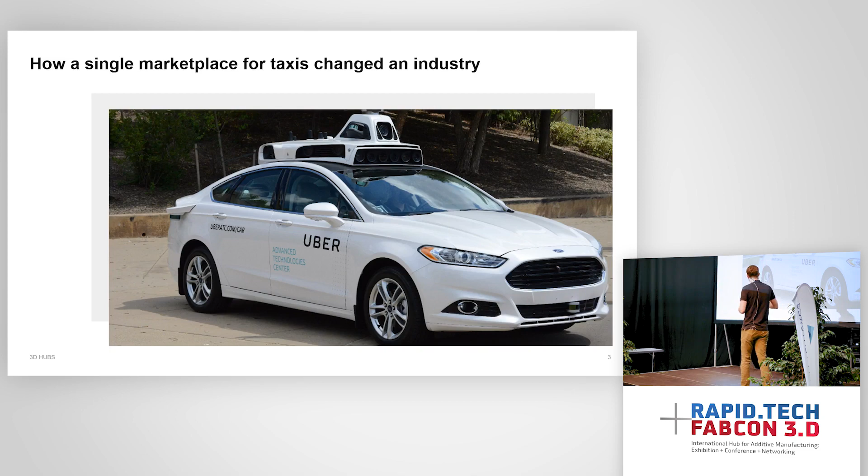And all of this has opened this little black box that used to be the taxi industry, where you never knew if you were getting a fair price, or if they were taking you on a crazy ride around someplace strange. Now it's all transparent so that we can make smart decisions.

Another good example I like to look at for a marketplace is Booking.com. If you go back to pre-internet days and wanted to book a hotel, you'd have to ring them all up and shop around to see where you could find the best price. Maybe the hotel had a deal, maybe the local tourism agency had a deal, but you had to contact all these places to find the best price. Booking.com, a Dutch company, came along and consolidated this all into one place. Now when you log on, you're shown all the options of all the hotels, and within each hotel, all the different agencies you can book through, so you can make a smart decision on cost and timing. Again, this puts the power in the consumer's hands. This is what marketplaces are good at.

Finally, and my favorite example, is the stock market. If I wanted to buy Apple shares back in the day, I'd have to go find a trader, go into his shop, and talk to him. I'd say, I'd like to buy shares, and he'd say, well right now this is the price they're trading for. I wouldn't have many options for research, and I couldn't really see what was available in the market. The person who walked in right after me had no idea what price I'd just paid, and no idea what price they'd end up paying or what the person after them would pay. As a result, stocks could be traded at completely different prices depending on what day of the week it was.

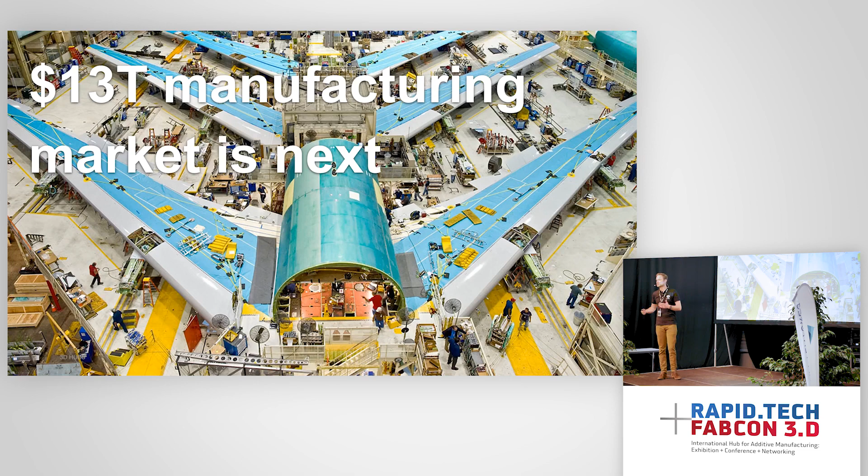Why is this the case? Well, some suppliers might need to order this material in, some might not have any capacity right now, and some might offer a short lead time at a very high price, but I don't know if that's fair or what's going on there. Within the manufacturing industry, 3D Hubs believes there are two things we need to figure out to really be disruptive, and the first is price and price transparency. This is really important, because going to three suppliers and looking up different prices every time, getting this kind of range, is a lot of work.

It takes a lot of time for an engineer or a designer to do, and they never really know what's fair. They don't know if they're paying a good price. They don't know how metal 3D printing is priced, or what the suppliers are doing.

The other area we think is ready for disruption in manufacturing is manufacturability. This is more complicated than pricing because there's a large range of variables to factor in when designing something to be manufactured. If you're talking about multiple technologies like 3D Hubs does - CNC machining, 3D printing, and injection molding - there's a huge range of design variables that determine whether a part can be manufactured or not. This is the next thing we want to solve.

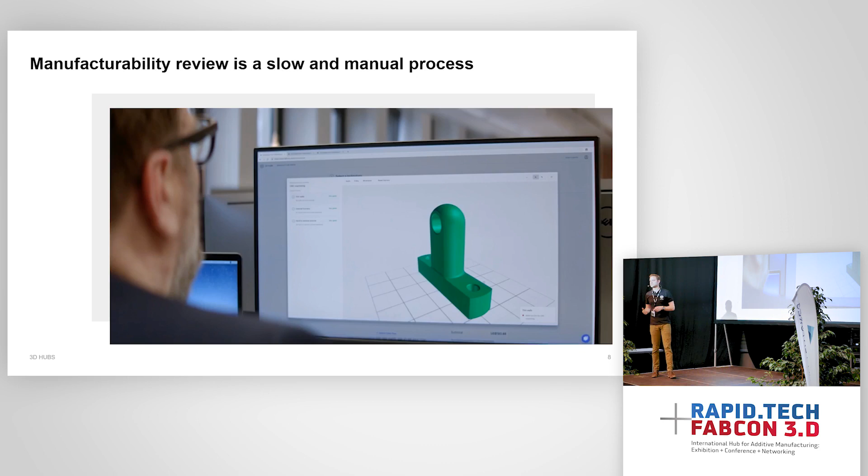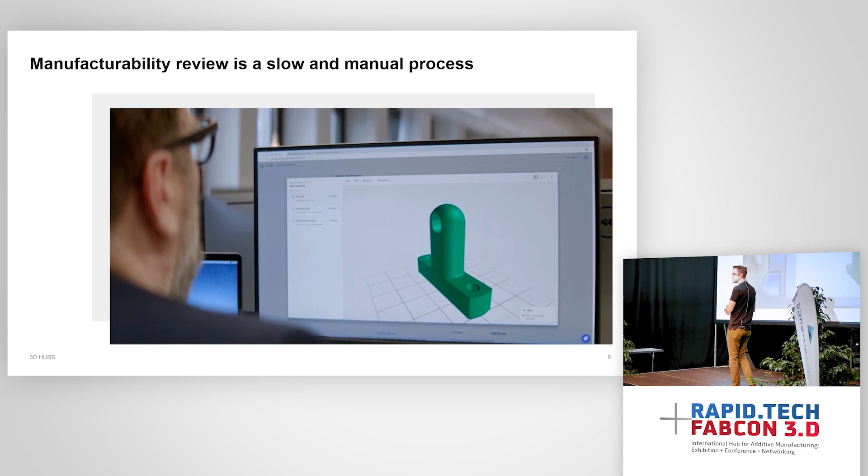So how do we do this with pricing? First, 3D Hubs is about 6 years old. We're based in Amsterdam, with a team of around 80 people, and we also have a small Chicago office. We've been doing this for a while, which means we've had around 3 million parts uploaded to our website over the 6 years we've been active. That's a lot of data points.

Data is one of the hottest commodities in 2019. You can make a lot of cool decisions and do agile things if you've got good data sets, and we do. So when we price a part on 3D Hubs, we look at parts we've sold previously that have been accepted by our suppliers, that have similar geometries, similar materials, are in a similar location, and are ordered at the same time of year. We take all this into account and use an algorithm to average this pricing and instantly price the part the customer has uploaded.

So we don't have a group of 100 engineers sitting in a dark room furiously working on Excel spreadsheets trying to write out quotes. This is all done instantly within 5 seconds by a smart algorithm. Going back to my stock market example, the result is that we become the stock market for manufacturing. We don't influence this price - it's what we're selling things to a customer for and what our suppliers are picking them up for that represents the price you see here.

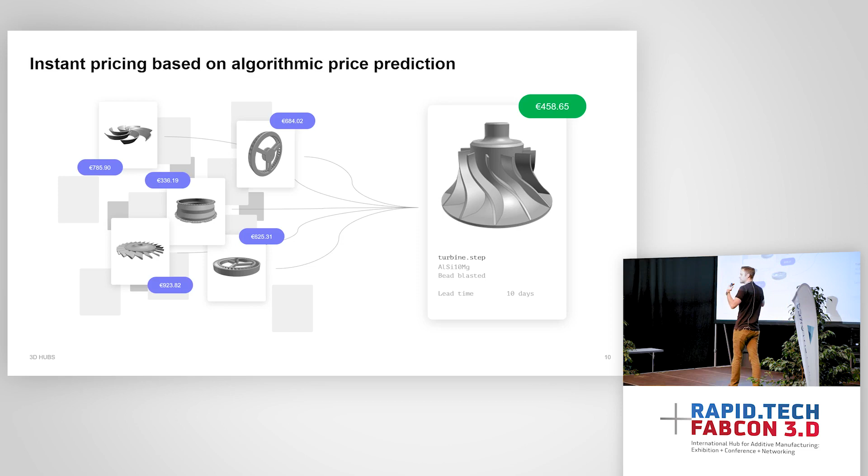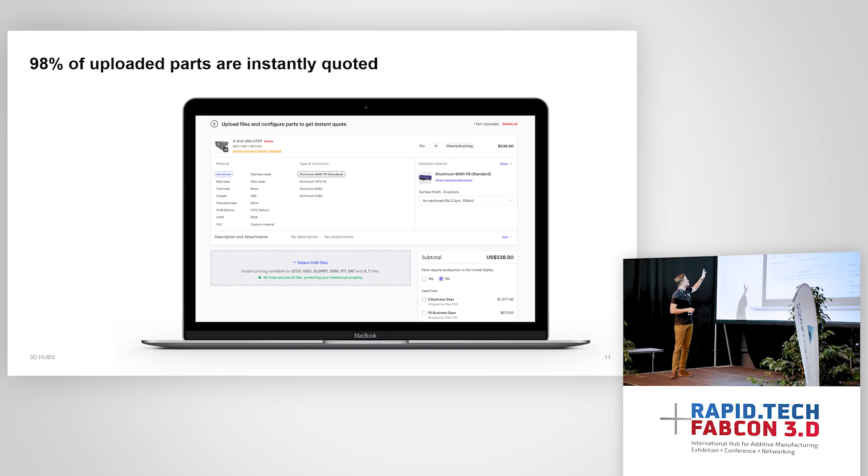We update our pricing automatically with an algorithm every week, feeding back all the deals we've sold in the previous week, which makes it very dynamic, very much like a stock market. It's alive, but it's a fair representation of the price. As a result, we've learned how to price parts. We have over 60 materials available on our website at checkout, and we now quote 98% of the parts you upload instantly. We can analyze them for a large number of features to really get smart about how we price.

I think the key to this is speed. If you're uploading parts and you come to something like 3D Hubs, you expect to see things quickly, and fortunately for us, 98% of the time, we can quote that for you. The other 2%, we have a team of very smart mechanical engineers who jump in to help you out with your pricing and work with our suppliers to build a quote.

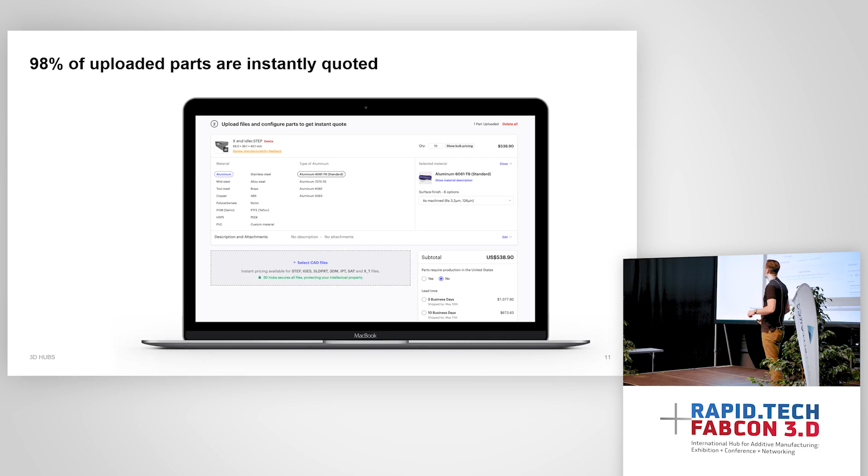So as I said, the other cool thing about this is that the price is dynamic, so it can change. Just like if you go onto Google Flights to book a flight, you can see, okay, the price is quite high this week, I might wait a week until I fly. The same thing happens on 3D Hubs.

You can upload your parts, see what it was valid for. We'll honor any quote for 30 days. So let's say you come back in 2 weeks and upload your parts again and it's more expensive, our original quote stands. But if it's cheaper, you just scrap the old quote and use the new one to order your parts. This type of marketplace fluctuation really opens up and adds transparency to the whole marketplace.

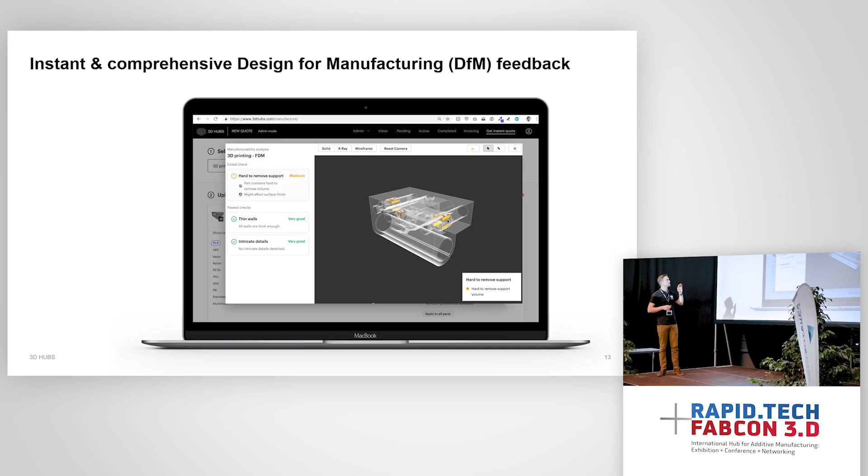The other cool thing we do, as I said, is design for manufacture. We analyze your parts on a number of features. Here's an example of a 3D printed part that's been uploaded to our website. We're analyzing here for hard to remove support material. This is an FDM print.

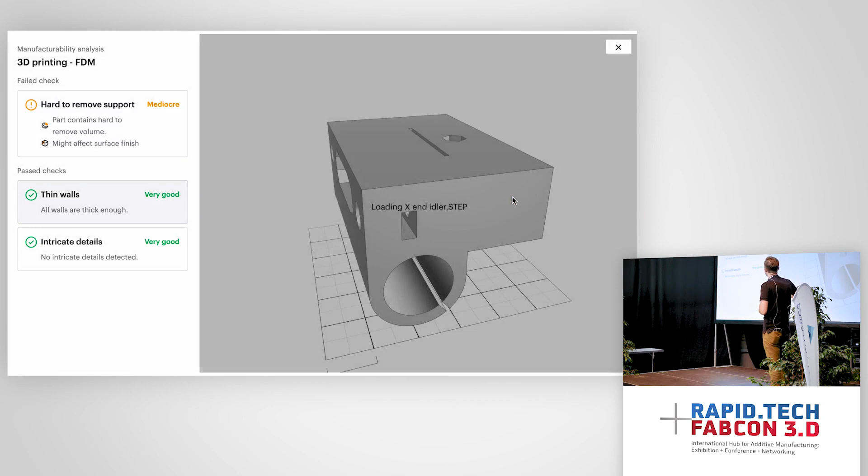We're also analyzing for thin walls, so areas that we think might have trouble printing in terms of detail, and for intricate details, areas that might fail when they're 3D printed with FDM. You can see this passes the thin wall and intricate detail check, but up the top we've got some hard to remove support, and a banana for measure, because everyone loves a bit of scale. We're all nerdy engineers at the end of the day.

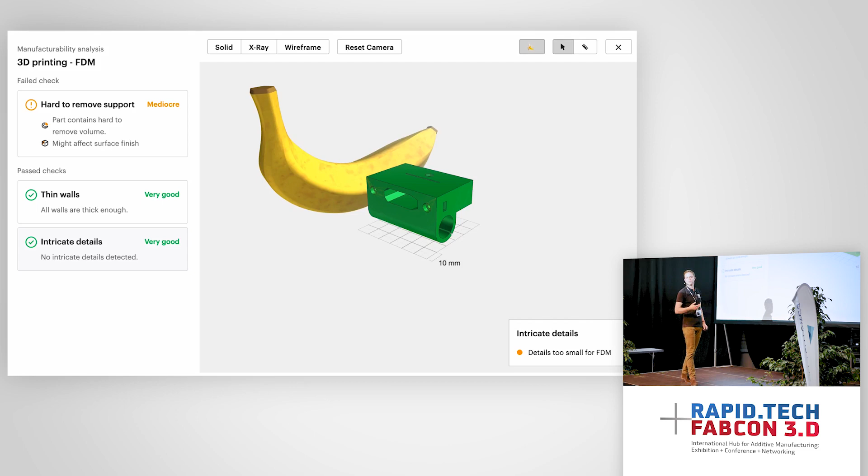So you can make a decision: I see this as hard to remove support material, do I want to redesign my part to eliminate that? Or am I okay to take that risk, knowing I might get a worse surface finish in that area where the support's located? Letting customers make these types of decisions and giving them instant feedback is key to what 3D Hubs is doing.

So we did a bit of research into the industry. We placed a few orders with some traditional manufacturing companies just to get an understanding of what the market's like, and how we compare to what's going on. This was the standard funnel for ordering CNC parts.

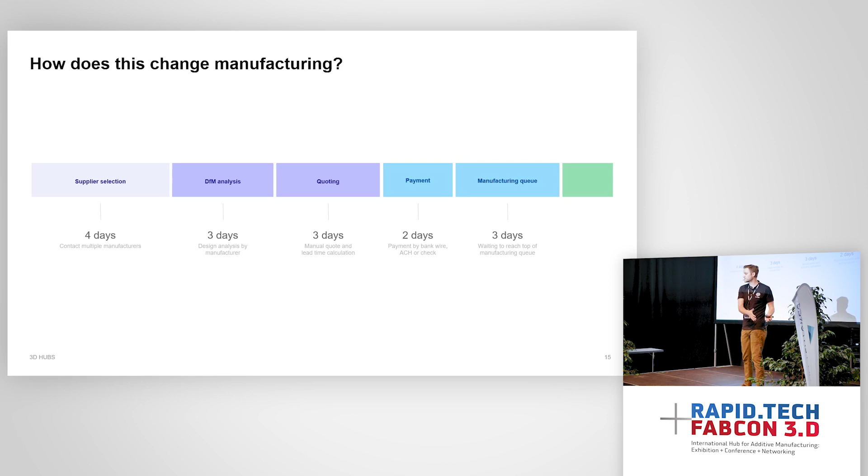We had 5 CNC parts machined in aluminium. Typically, you're going into your network or reaching out to customers and trying to find people available, around 4 days when you want to start getting quotes. Then you're doing design for manufacture analysis with the manufacturer you've selected, working together to make sure they can produce the parts. If they don't have 5-axis machining, you can't upload a 5-axis part with them.

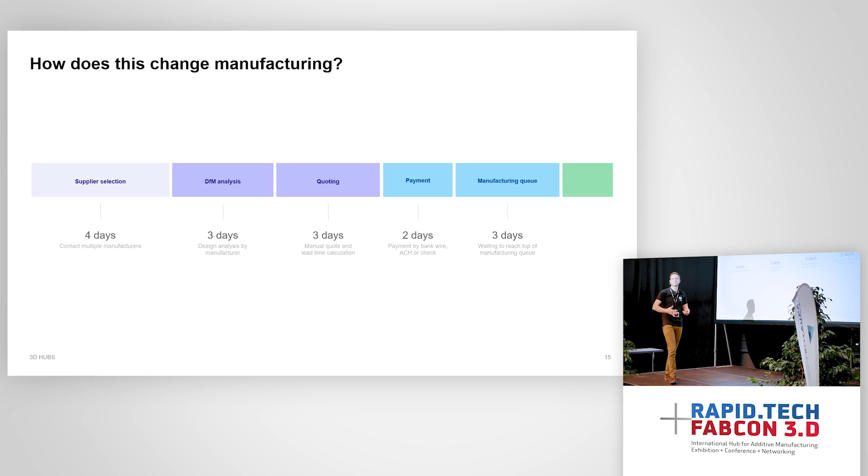You have to redesign your part to suit their capabilities, something you don't have to do on 3D Hubs because of our large network. Then you spend about 3 days quoting. Everyone loves the quoting process, back and forth, bartering, them trying to get the price up, you trying to get it down. Payment, 2 days depending on where you are in the world, and then into the manufacturing queue. You never go into production straight away, you're always waiting for the option to open up in the job schedule. How do we change that?

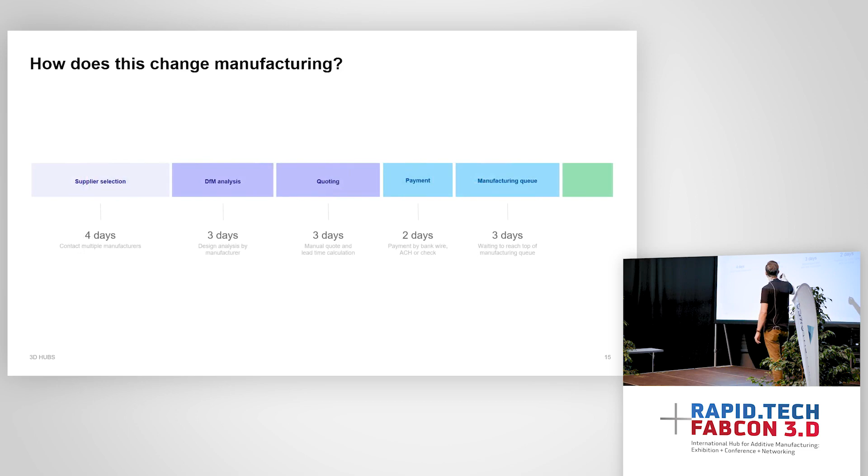This is how things work on 3D Hubs. We do all of this in less than 5 minutes. Everything on that last slide - supplier selection, design for manufacture, quoting, payment, manufacturing queue - 5 minutes, boom. Straight away you are there.

On average, we put parts into production on CNC machining within 2 hours, and on 3D printing we do it in around 3 hours. So things move very fast and your parts go into production.

For CNC machining, we average 10 days for production, we also have 5 and 15-day options. For 3D printing, we can go as low as 2 days depending on where you are and what technology you need. Injection molding, we can do 4 to 6 weeks if your geometry lines up with our offering as well. All this much, much easier, and it just lets you decide what you want to do.

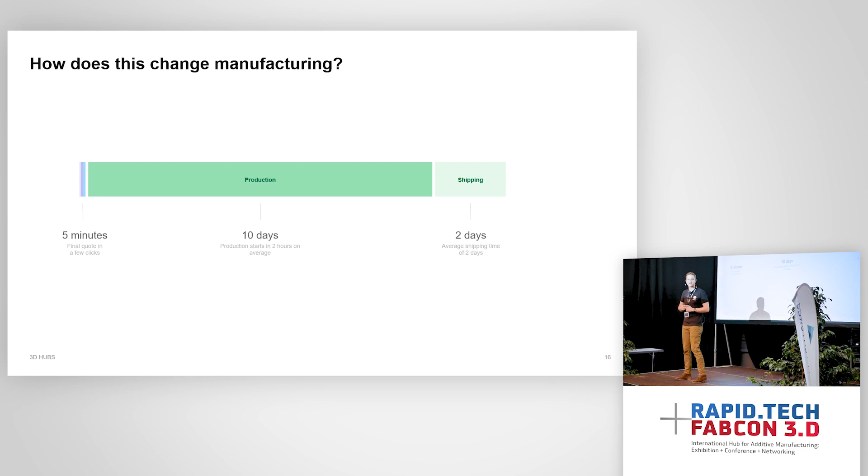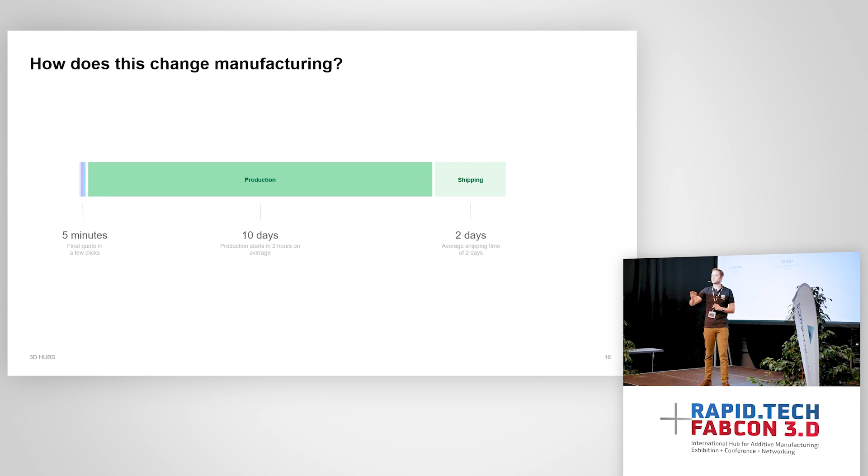Some of the cool stories I hear about people using our website - they'll upload 5 designs of the same part, all with slight variations. Maybe one's got a chamfer, one's got rounds, maybe one has no threads and one has threads because you can do threading capabilities in-house. You can quickly decide based on the price we show you whether that fits within your budget and it's the price you want to commit to.

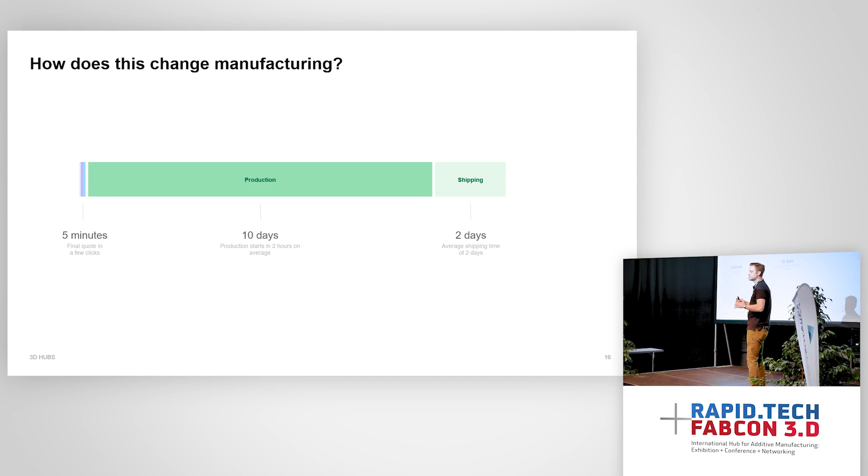Using our tool to really iterate and get smart about your design is a whole other benefit, outside of just being able to work fast and get things into production quickly.

So on the backside, what actually happens with our suppliers? I think this is something people are always interested about. The standard question I always get from the audience is, how do you control quality? How do you make sure people produce parts to specification?

We have a very strict onboarding process. First, any supplier can come in and apply to our website. They go through an application process online, and it's then reviewed by our supply chain management team. At that point, they'll ring the potential supplier if they think they're a good fit and talk with them about why they want to work with 3D Hubs and what their goals are.

After that, if that all goes well, we'll typically visit their factory and do an audit. Then we'll send them test parts to complete. And if that all goes well and we can see their quality is up to what we expect, then we slowly introduce them into our platform. They get low value orders for the first month or so to really figure out how things work and what the experience is like, and then we ramp them up and up.

If their metrics are good, they have low dispute rates, and they're delivering parts on time, then basically we give them access to everything. That's really the process we follow. We always keep strict control, do monthly reporting to see how they're going, and it's something we take very, very seriously.

How does it work as a supplier? The moment that you as a customer click the 'in production' button, your order flies off into the system, and if a supplier has indicated to us they can do that material, meet those tolerances, and have that technology available, it'll appear on their job board, shown to all the suppliers that have indicated they can do that type of order.

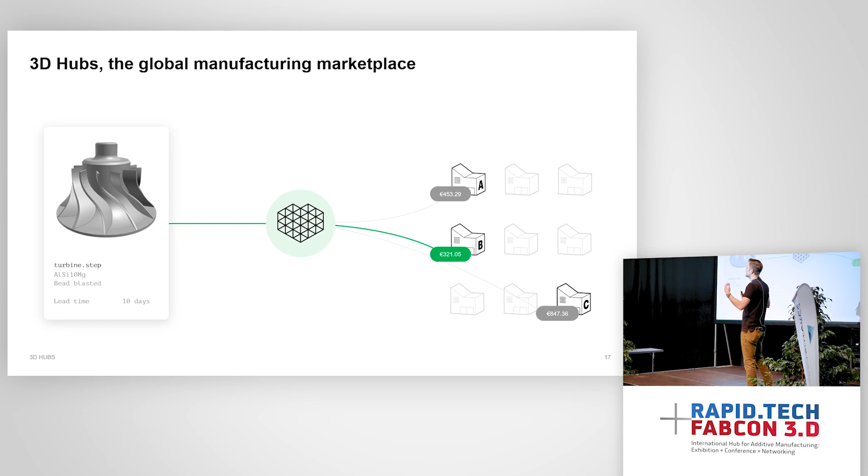You can also jump in — if you tick threads or tolerances, we require you to upload a drawing. We need those for manufacturing the parts, and that gets sent on to our supplier.

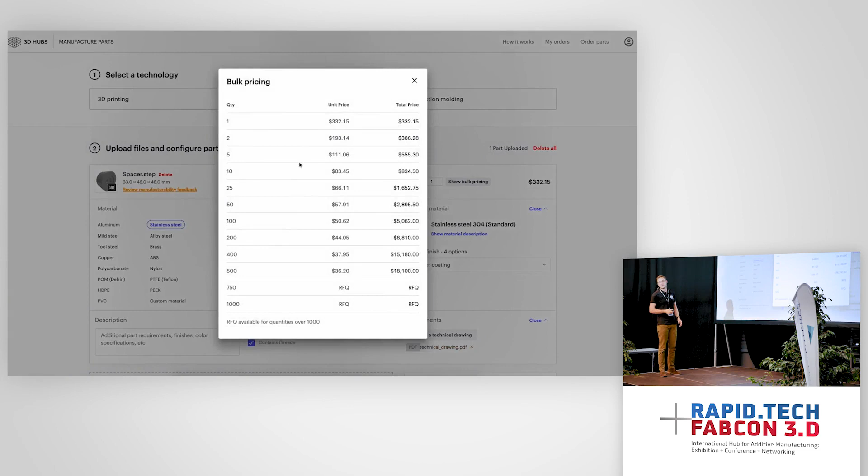We also show you instant bulk pricing, so you can make a decision — okay, I want economies of scale out of this. If I order 10, I can save a lot. Again, you'll get instant feedback as soon as you update your quantity. Here you can see we've got some hard-to-remove volume up the top.

We're analyzing for whether this needs 3-axis or 5-axis CNC machining. We're also checking for thin walls or internal corners. All these can affect price. All of these are things we give feedback to our customer on to make decisions.

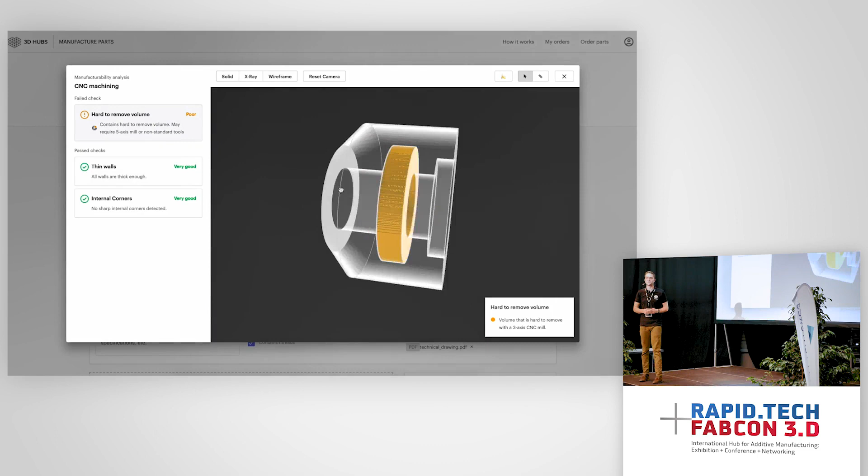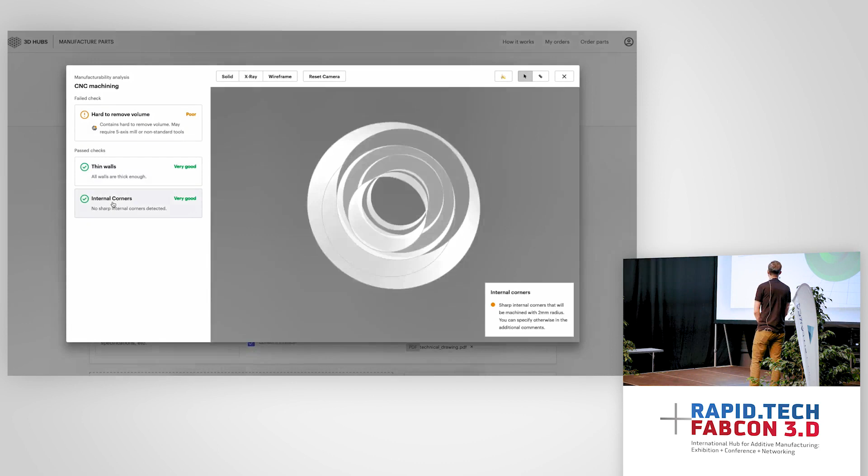Here you can see the hard to remove volume in the middle of the part. Does the customer want a redesign to take that out? Are they happy with the extra cost that this adds? If so, no problem, they can come straight through, accept the order, and put it straight into production with 3D Hubs once we've got their information. You can see there's no internal corners on this part, so it passes all these checks.

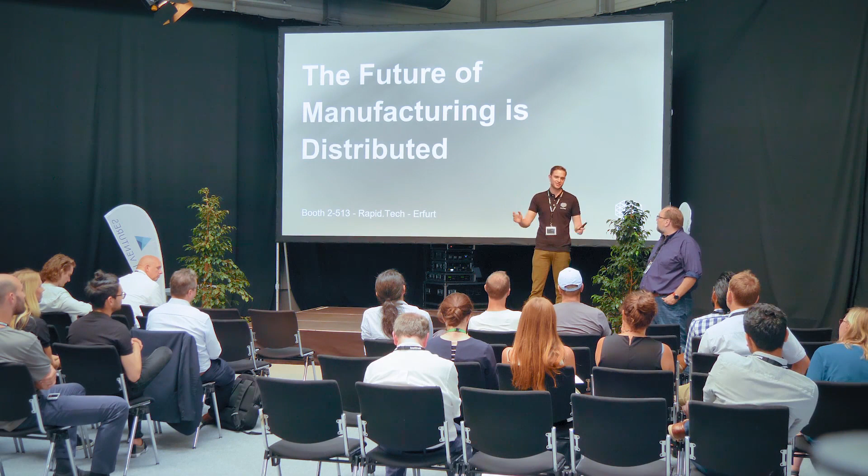And Amanda and our marketing team produce amazing content online for students as well, where we have a lot of articles about how to design or specific applications for 3D printing. So we embrace the education industry, and we'd say utilize this as much as you want. It's there for a reason.

Isn't there competition for students? Yeah, actually a good point. We're also running a student grant at the moment. If you Google 3D Hubs student grant, we're giving away a reasonable cash prize to some of the best 3D printing entries from around the world. And we really push these with our marketing team and with PR. They do very well, some have been covered by the Discovery Channel or CNN in the past. So great exposure for students who are working on some cool projects.